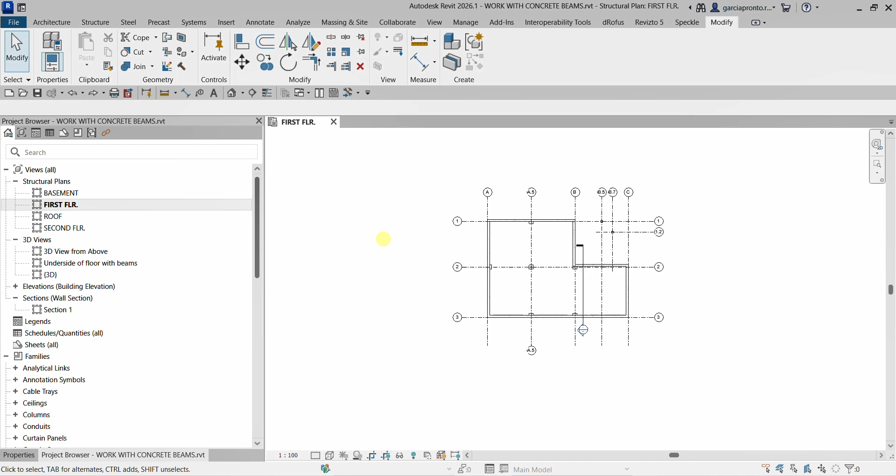All right, so in this exercise, we're going to create cast in place and precast concrete beams. And then also, I'm going to show you how to edit the concrete beam joints. Okay, so the first thing that we'll be doing, let us add some cast in place concrete beams.

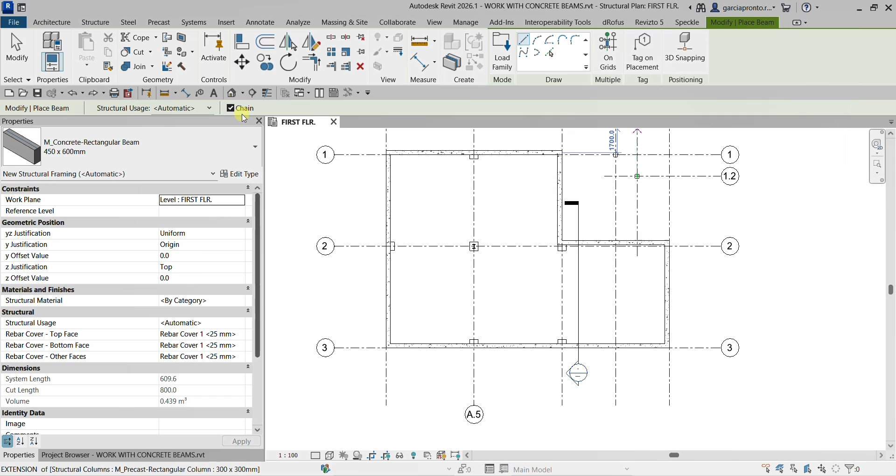Okay, so let's go to the Structure tab, and then I'll go to the Beam tool. So I select the Beam tool, and then from the properties, these are the types that are loaded in the project. So I'm gonna use here 450 by 600. And I do not want to put a tag on it, so that's why I'm gonna leave this one unchecked, and then I'm going to uncheck the chain here. Okay, so let's do this.

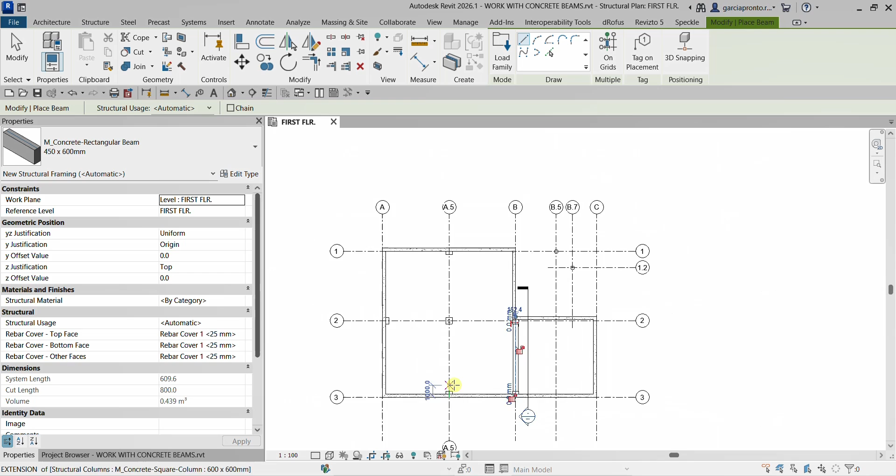So I'm going to add a beam on, let's say, B3. So I click that, and then after that, I'm going to click the intersection here. So there you go. Very simple. All right, so the next thing, let us add another beam, but this time I'm gonna check the chain tool. So let me place it here. I'm gonna click that, and then snap at the midpoint. There you go, and it's chained. That's why it's continuously creating my concrete beam.

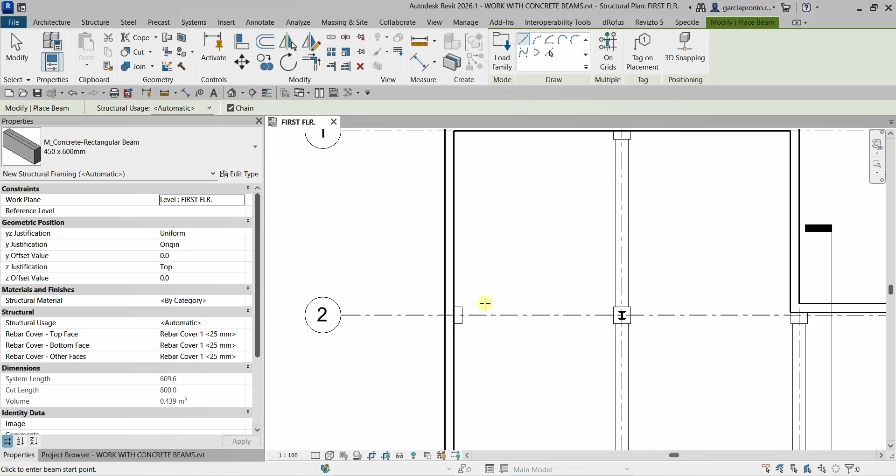So I click that, and then I'm going to press Escape once so that it will not totally terminate the beam tool. So just press Escape once, and you are still on the beam tool. All right, so what else? So I want to put one here to here. There you go, and then I'm going to pick here. All right, so I'll just select Modify. So there's now our concrete beam.

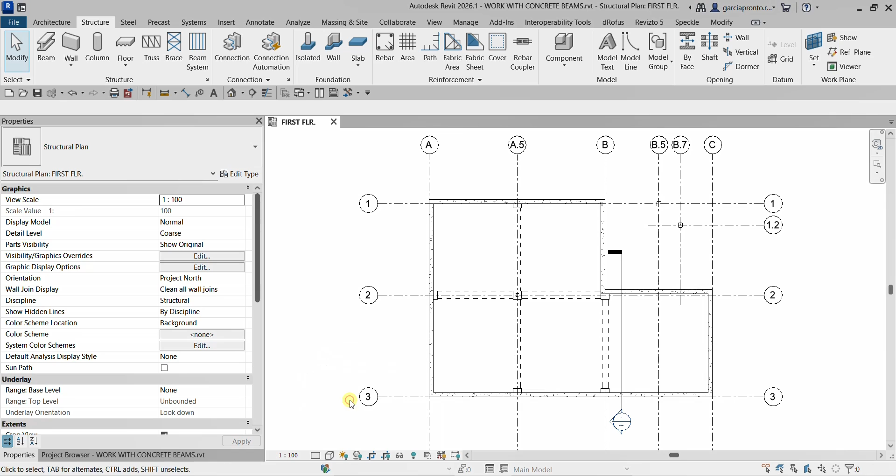So I can change the detail level here, or the visual style, to hidden line, and you will see how it looks. So hidden line, and there you go. It's now a hidden line. So let me go to the 3D view. Okay, and so there's my concrete.

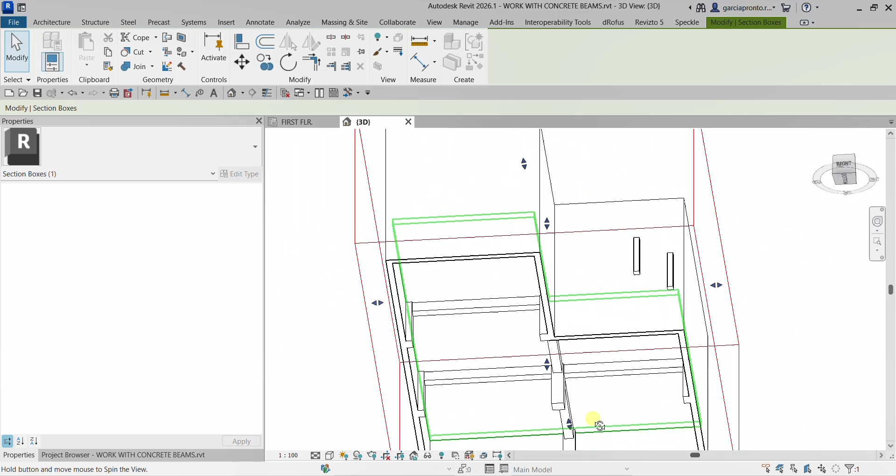Okay, so I'm going to turn on my section box here. So just check that one, and then I'll just click the section box and then move it up. Oh, too much. All right, and then maybe I'll select and adjust. So this is now how it looks. So I'm gonna type SD to change the visual style to shaded view.

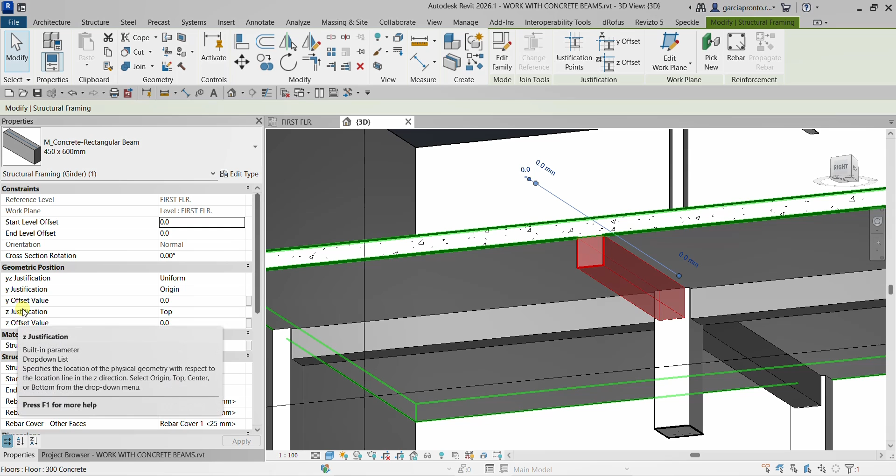There you go. And then if you want to modify your concrete beam, if you select your concrete beam and check the properties here, you can modify, let's say, the geometric position. So you can modify the YZ justification, and then you can also add an offset value. Like, for example, if you want to add another offset on your concrete beam, you can change the Z offset value. Okay, so the justification here is top.

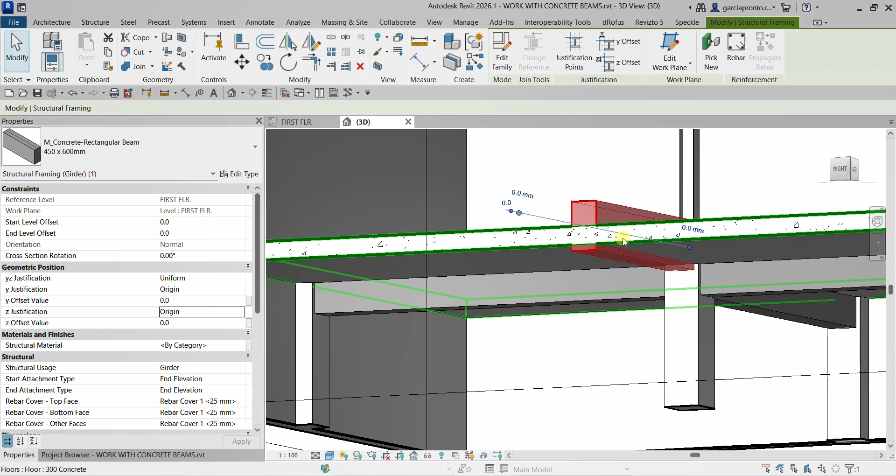So let us play around. Let's change this one. What does it look like if it is origin? So there's the origin, and top. There's top, center. There's center, and then there's also bottom. There you go. Okay, so now I'll just put it back again to top here.

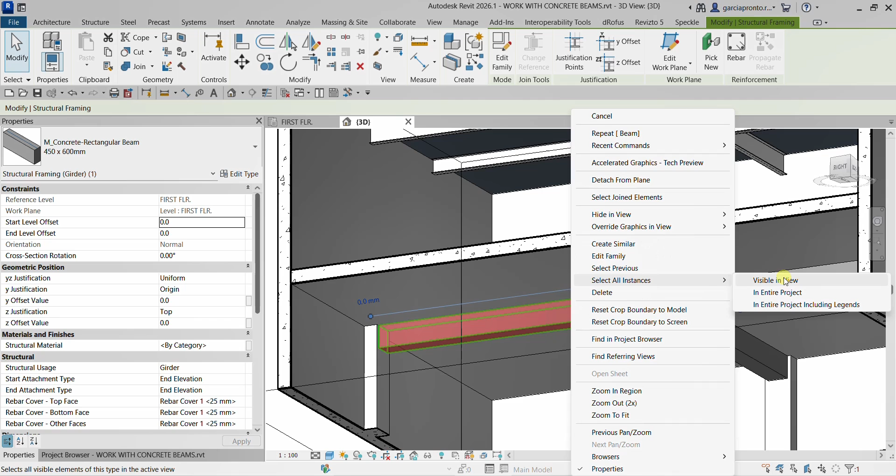So what I want to do is I'm going to select all of my concrete beams. So I can click one of the concrete beams, right click, and then select here. Where is it? Select All Instances, Visible in View. So if I select this one, as you can see, I have here 4 concrete beams. So I have 1, 2, 3, 4. Okay.

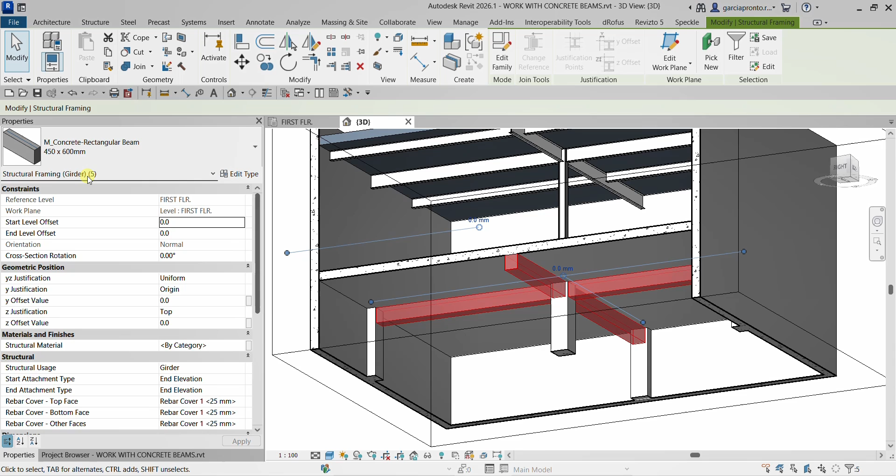Right, so another option: click, right click, select all instances. If you select here in entire project, as you can see, it also selects the other beams that are not showing in this view. Now it says 5. Okay, so if I try to adjust this one, okay, so there's the 5th one, right?

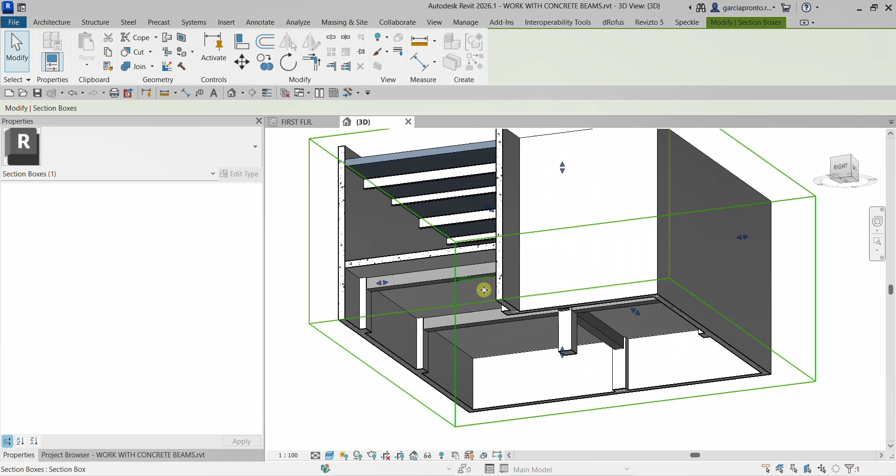So click, right click, select all instances visible in view. So the total here is 5. Okay, so let's say, for example, what I want to do is adjust the Z offset value. So let me select, right click, visible in view. So I have 5 girders. So I'm gonna change the offset value.

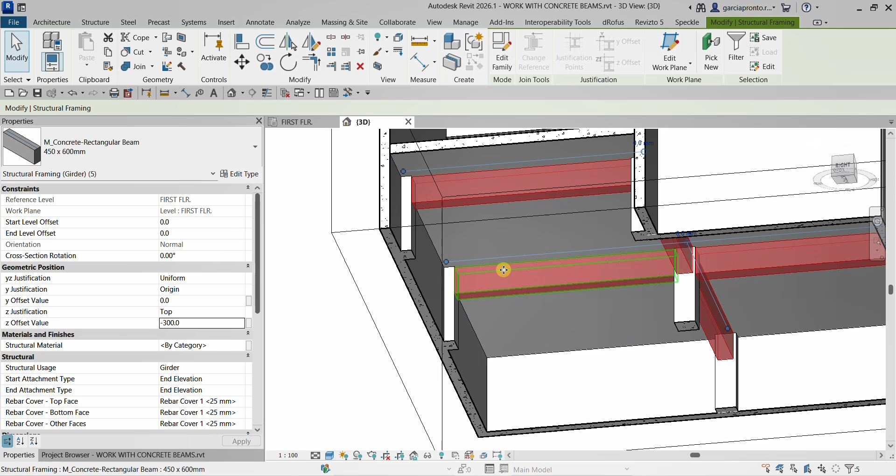I'll just change that. Let's say I want to add another 300. Okay, so I'll select here offset value minus 300, and then apply. There you go. So there is an offset value there of 300.

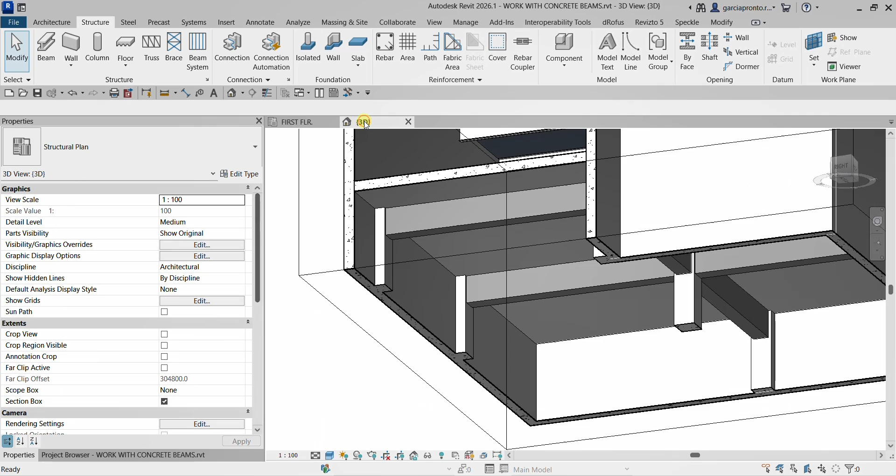Alright, so now the next thing that I'll be doing, let me go back to my first floor. So I'm going to add some precast concrete beams here. Okay, so let me just go to the 3D again, and then I'll adjust this one to show this side here. Okay, and then I select the first floor, and then I click tile view so I can see it side by side. There you go.

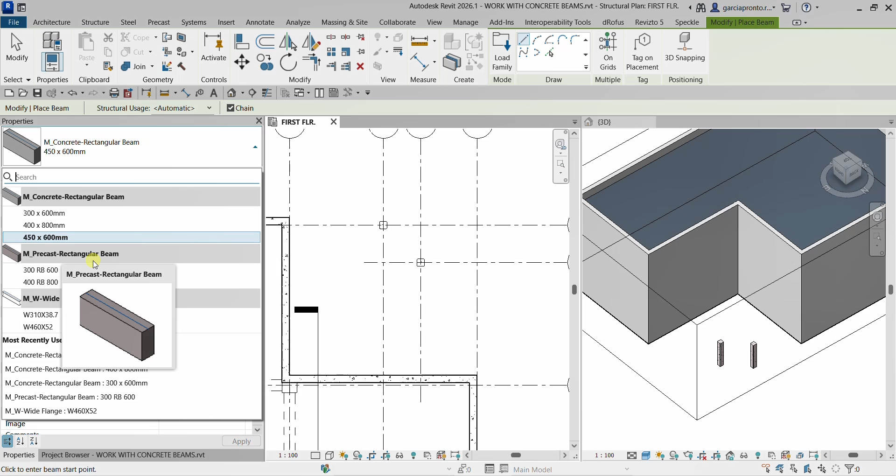All right, so let's create our precast concrete beam. So I select the beam here, and then from the type properties, I select here the precast concrete beam. So let's say the size that I want is 300 RB 600. So I'll select that one, and then I want to make sure that the chain here is checked so I can create it continuously. Again, I do not want a tag here, so I'll just leave it as it is.

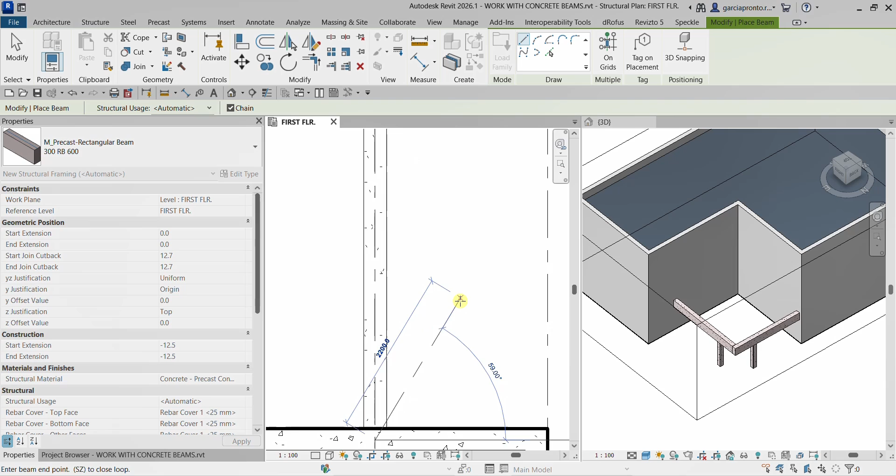All right, so using the line tool, I'm going to click here, click that, and then I'm going to click this one here. There you go, and then I'm going to click here. There you go. Okay, and then I'm going to select here, modify.

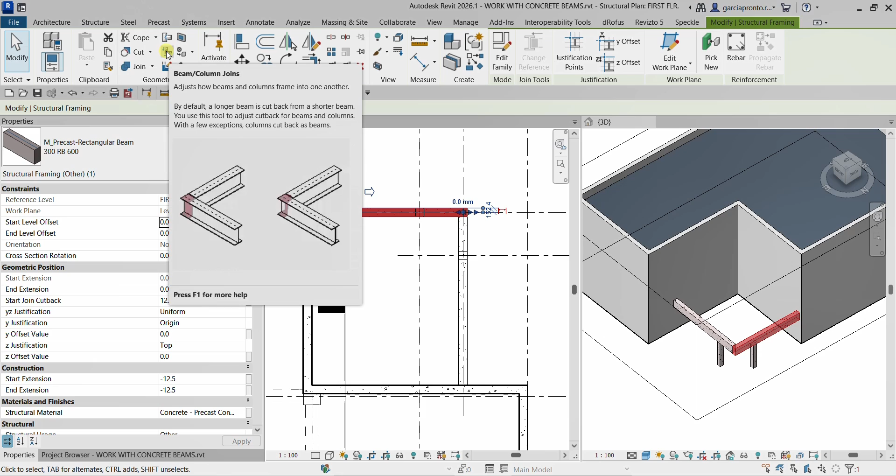Okay, so aside from that, you can also edit the concrete beam joins. You can go to the beam join editor. So let's say you want to change how these two beams join. You can select one of the beams, and then from the modify structural framing, go to the geometry, and then you have an option here, beam column joins. So I'm gonna select this one, and you are now on the editor.

So as you can see, you have here some arrows, right? So if I select this arrow here and click that, there you go. Notice that the arrow control reverses, indicating that there is no cutback for the beam, and the beam now extends to the wall. So same with this one here. If you want, you can click that arrow and it's now extending to the wall. So there's no cutback.

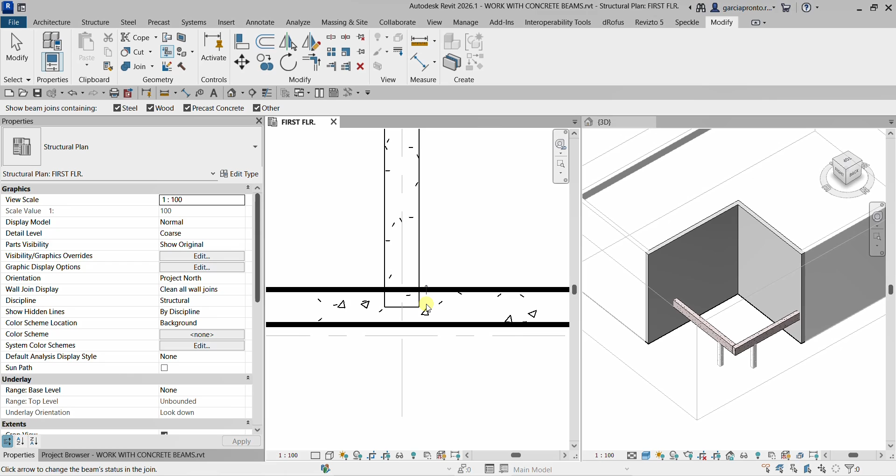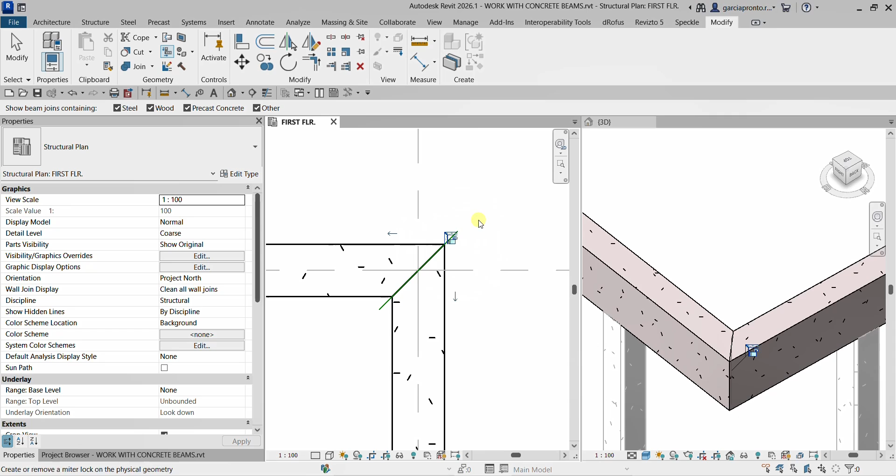Now for this join here, what I want to do is make it like a miter join condition. So I'm going to select this arrow here. I click this, and there you go. So it's now a miter join. And then there's also a lock icon here. If you want to lock this join, you can click the lock there. Okay, and then after that, just select here modify to terminate the tool. So there you go. So there's the join now.

All right. So that's it for this simple exercise. So hopefully you learned something from this video.